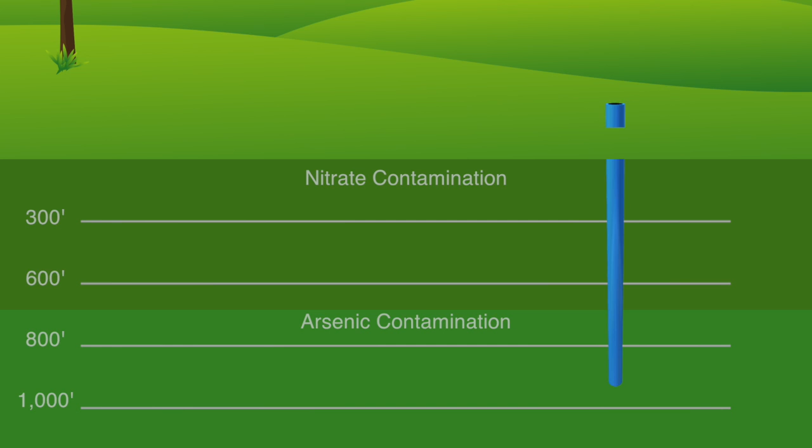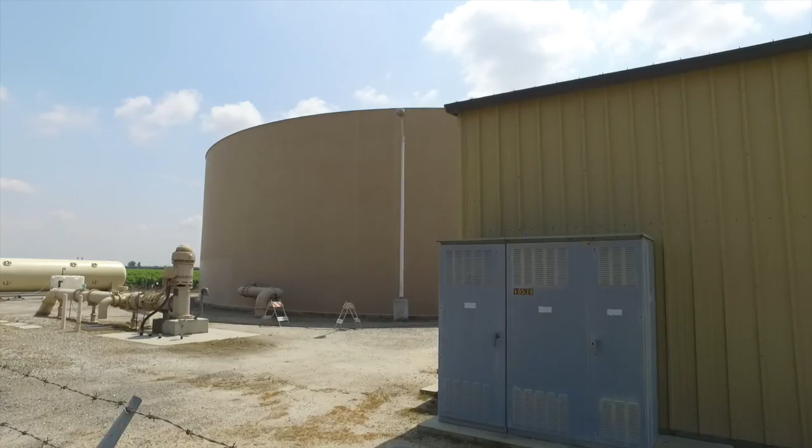During the 80s, when nitrate became an issue, in order to get away from it, we drilled deeper wells. We sealed them down to about 800, 900 feet, which got away from the nitrates. We're in the higher level, but the arsenic was below the MCL of 50 parts per billion, it was like in the 20s or 30s. So when the MCL changed for arsenic, we would have to either treat the wells that we had, or drill new wells. Out of 14 wells we drilled, 5 had to be abandoned because we couldn't make viable wells. The other 9, 2 of those we're having to treat. So we're shooting about 50%.

The community is very aware that they are paying for quality water and they want to get it on time, all the time. Nitrates going up and having to shut down that well was not going to be a pretty thing. Nitrate comes from a number of sources, including farm usage around here, a very agricultural area—that's the most common source for nitrates. We also can get it from septic tanks.

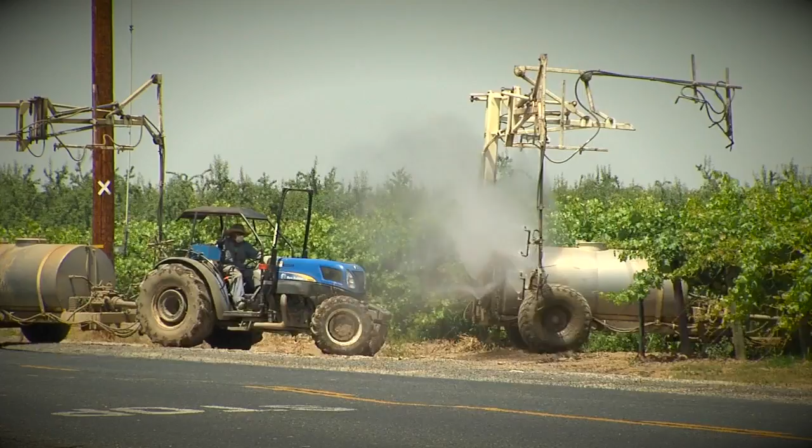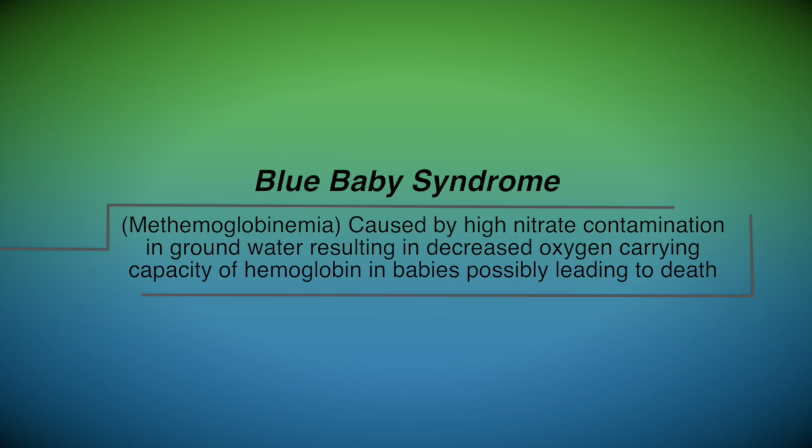The challenge is that it affects our populations in various negative ways, and there's even new research showing greater effects on the wider population that aren't yet quite understood. The main known health effect associated with nitrate is called blue baby syndrome. It's essentially a reduction in the oxygen carrying capacity of the blood. This is a particular issue for infants, where nitrate gets into the gut, can be converted to nitrite, and then literally the capacity for oxygen in their blood decreases. So you lose the ability to move oxygen throughout the body.

Nitrate is one of, if not the most common groundwater contaminant across the United States. It's found all over the Midwest, the agricultural Midwest. We find it throughout California, the Pacific Northwest, it's in Texas—it's really all over the country. You can see all the areas where there's a lot of agricultural activity, you see a lot of nitrate contamination.

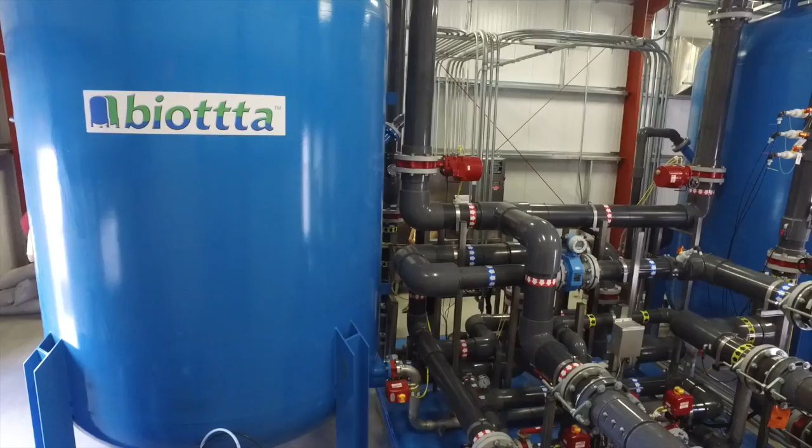Biological treatment is really an old school concept of using naturally occurring bacteria that are already in the groundwater, letting them grow up into a biological reactor and using them to chew up the contaminant and convert it to a completely harmless end product. You might call the nitrate to these organisms kind of like a Hershey bar—they're able to utilize the energy that comes from that, and that's how they grow, that's how they get the energy to grow.

MCL stands for maximum contaminant level. It's essentially the standard that the EPA sets for a particular contaminant in the groundwater. This particular well has a nitrate treatment issue—it's now above the legal limit for nitrates in the groundwater, and so a treatment system has to be put in place in order for them to use this as a reliable source of groundwater for the drinking water system.

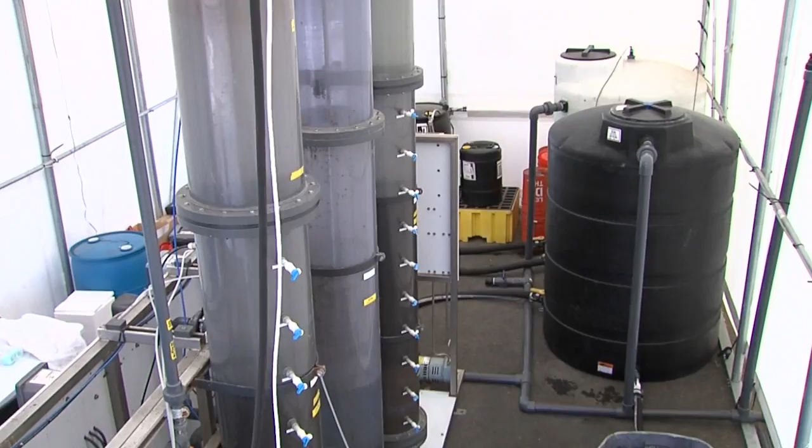So this is the City of Delano well 35. This is about our 3rd generation Biottta pilot. We have the raw water that's coming in, and you can see it's going to these break tanks. Once the water gets there, the pilot takes over.

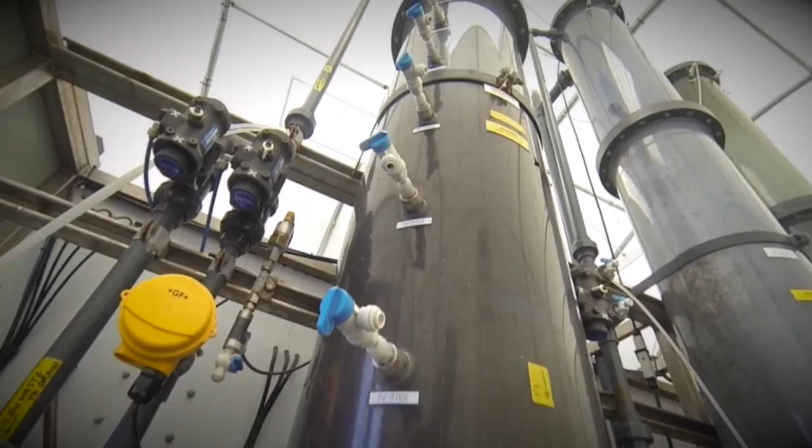There are basically 4 main components to these pilots: there's the unit processes, these tall columns right here, a feed pump here that takes water from the raw water break tank and pumps it through the system and to the unit processes. This is the first stage fixed bed bioreactor here, where all the nitrate gets reduced to nitrogen gas. This is the granular activated carbon that we use.

As you can see, this is absolutely fresh activated carbon, so we're not inoculating bacteria before we put them inside the biota process. We use bacteria that's already existing in the groundwater.

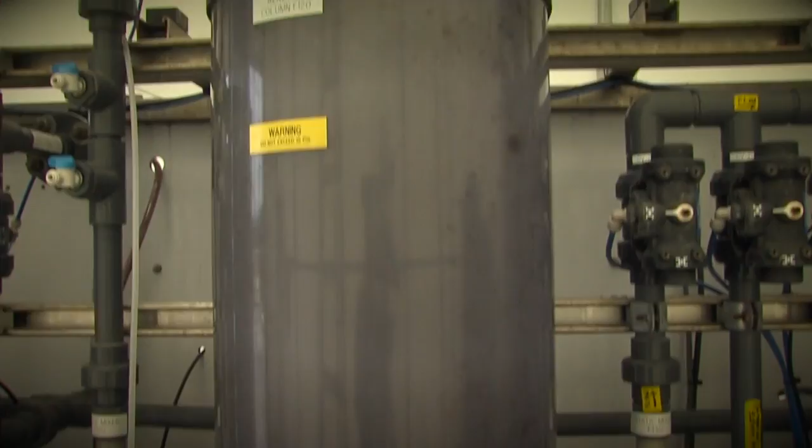The water then passes, it can either go into the second column, which is a degas unit, or it can bypass that column altogether and go into the second stage aerobic biofilter, that third column right there, which is both sand and GAC. So the first component is the unit processes.

The second main component of our biota pilots are the chemical feeds over here. You can see 5 tanks down below here that we keep full of the food for the bacteria. These tanks are filled every few days or so, and then little peristaltic pumps feed those chemicals into different parts of the unit process. So right now I'm making chemical stock for the chemical tanks that feed into the biota process.

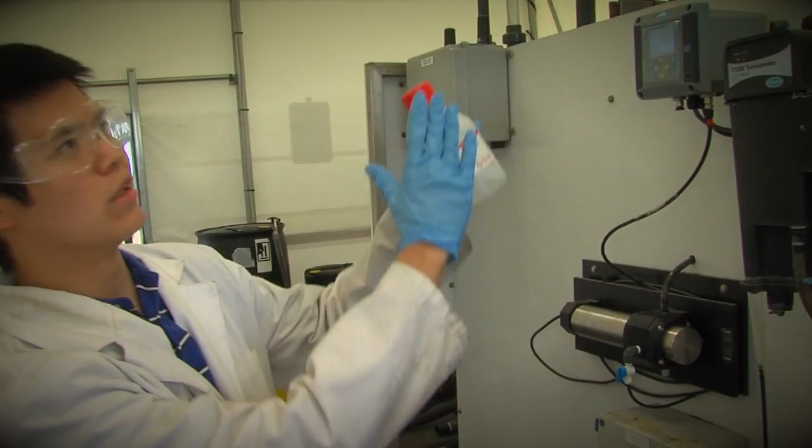So you can see these are the peristaltic pumps, and we can automate so that they pump a certain speed, a certain dose into our biota process.

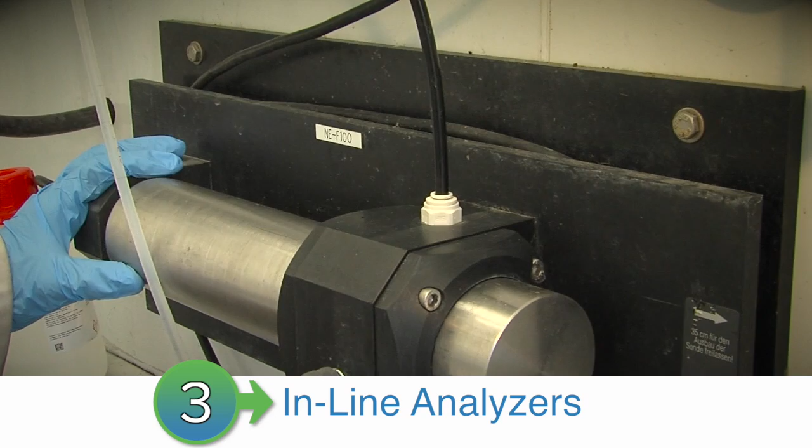The third part of our pilots are the inline analyzers, which you see above the chemical feeds. We have our inline nitrate analyzer, dissolved oxygen meter, and then 2 turbidimeters here as well.

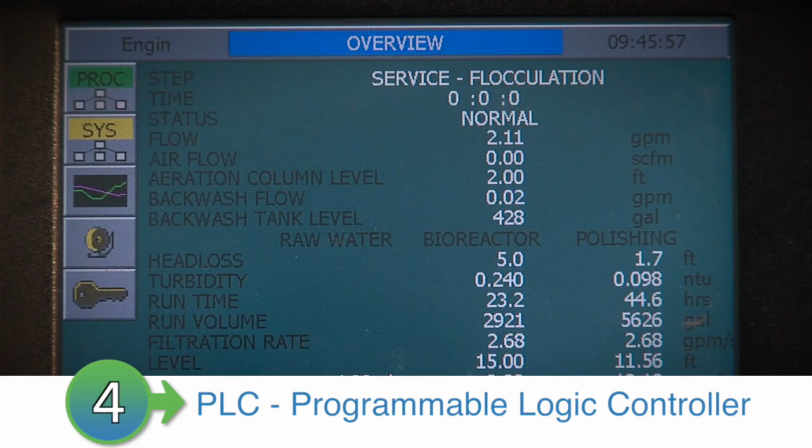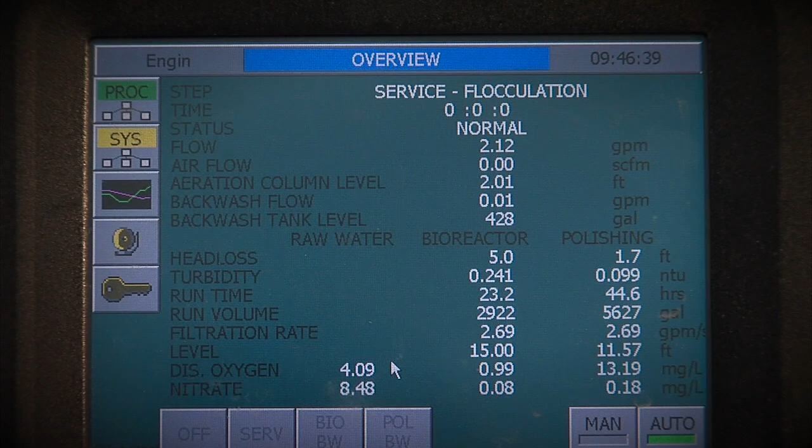Perhaps the most important is the brains - the fourth component, our PLC, which runs the system. It's very important that these systems are completely automated, so the system is programmed based on the operating set points that we've developed and honed over the years, and we can go in here, physically set those operating set points if we want, and download data and so forth right here on site, or this same human-machine interface right here, I can download onto my laptop wherever we are, wherever I happen to be, and look at that same screen and change operating parameters, download data, and things like that. This is the whole thing that makes the system go.

There are 2 main reasons why the biota system is particularly green. One is that it converts contaminants to harmless byproducts. The second thing is that the biota system requires very, very low energy to operate. The O&M costs on this system tend to be very low. We want to be able to put these systems in, and then they just go.

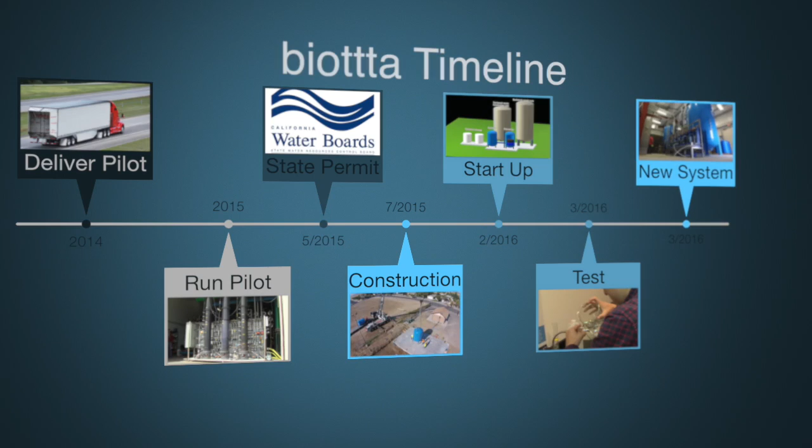The California Division of Drinking Water is a group we've been working with for a long time. They've given us the conditional approval for the process, and we'll be permitting the full-scale system that goes right here at well 35.

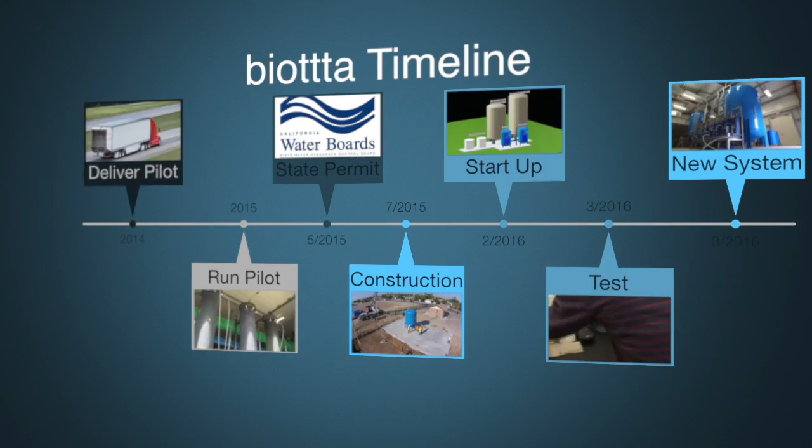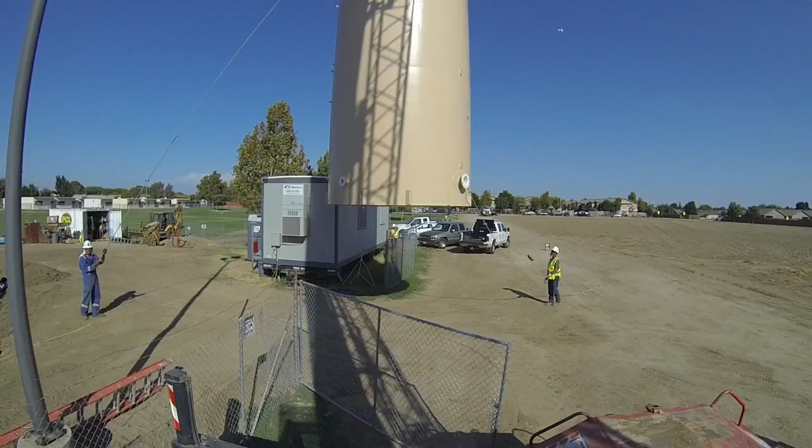This process started for this particular installation about 2.5 years ago, where we went and approached the state of California as a new technology that could solve a widespread problem throughout the Central Valley here, as well as throughout California, and ultimately throughout the United States and the world.

I found out about the Prop 50 Chapter 6B grant money. It is specifically targeted for research projects to address a contaminant that is of widespread concern, and the City of Delano was very excited to partner with us in this opportunity.

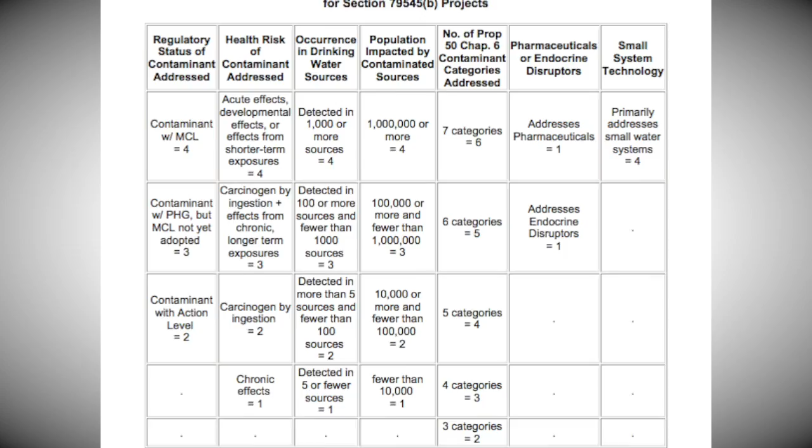Carollo has been an incredible partner with the city for the fact that we got to be the first site to be able to utilize their technology and their pioneering efforts, and even more, for it to be successful, I think it just speaks volumes in regards to their initiative and wanting to make sure society is able to progress and Delano benefiting.

So the pilot testing showed that we can remove the nitrate from the groundwater very efficiently in short contact times. We used all those design criteria from that pilot study to build this full-scale system behind me.

There couldn't have been any better results. It looked fantastic, and so there's very little doubt going into a full scale when you have such good pilot work.

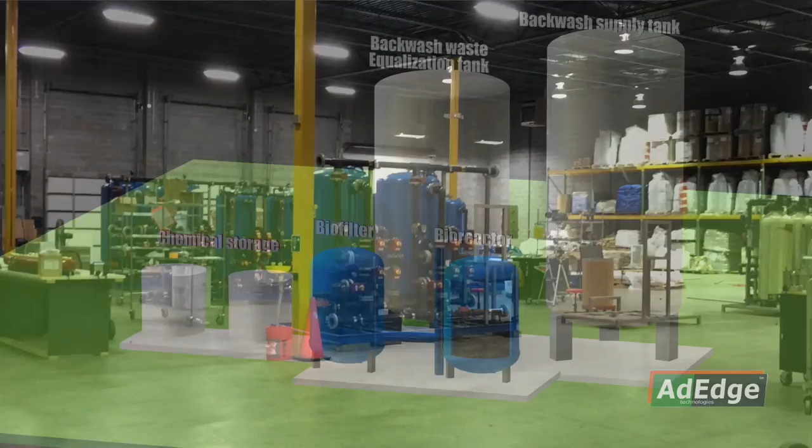AdEdge is an applications company. We bring technologies into the marketplace and apply them for communities, mostly in the groundwater industry for municipalities. And in the case of biottta, it's a biological process that's been developed, and then we bring it to the marketplace.

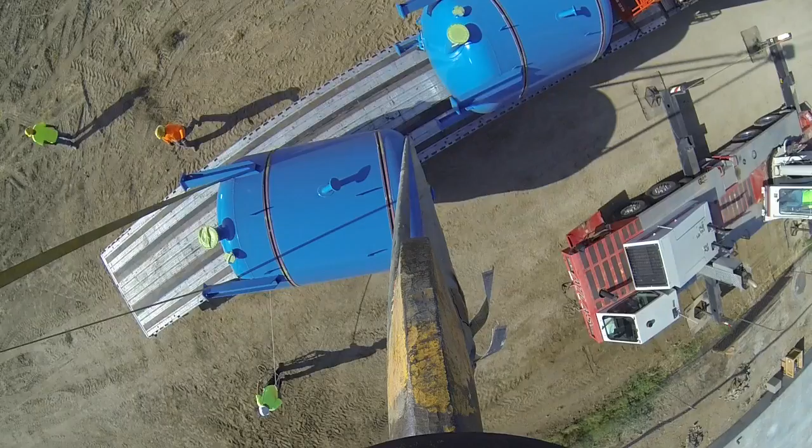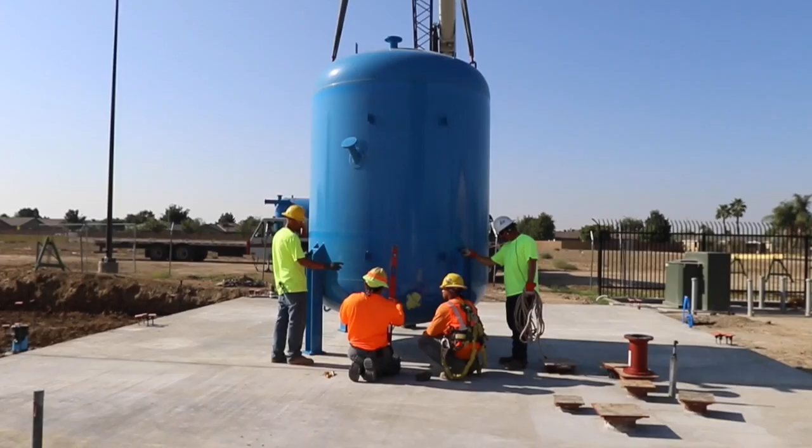In the case of Delano here behind us, we have a number of sub-assemblies that were manufactured at AdEdge in Duluth, Georgia. And so what that does for us is it allows us to control the manufacturing process and then deliver components to the site that then get tied together.

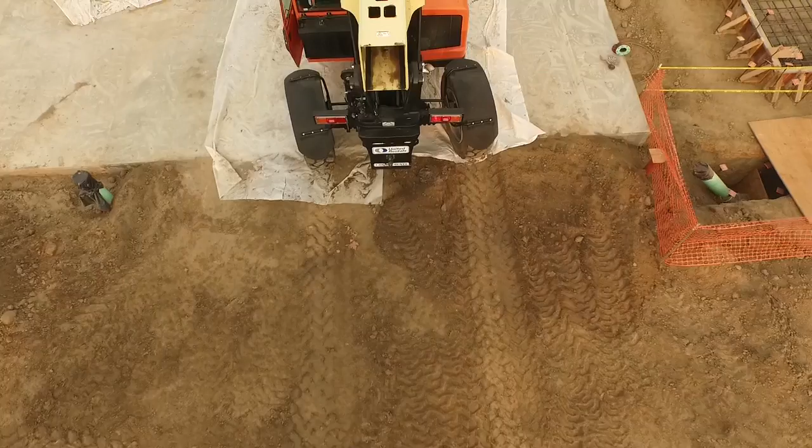So we have one main degas skid in this case, where that holds our process pipe, our valves. A lot of the moving parts are on that main skid.

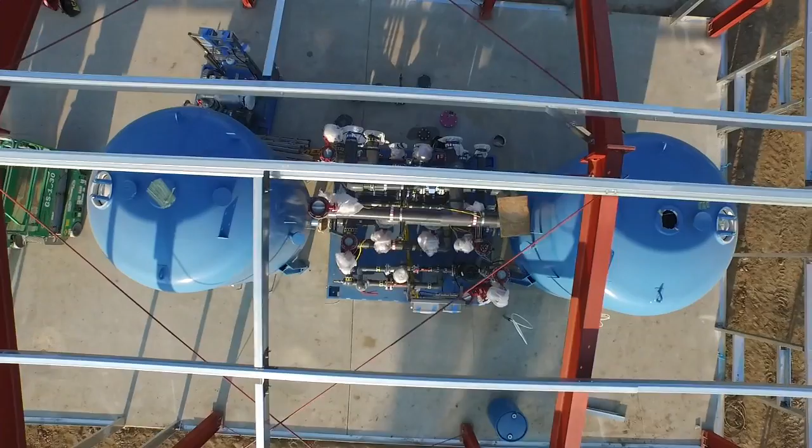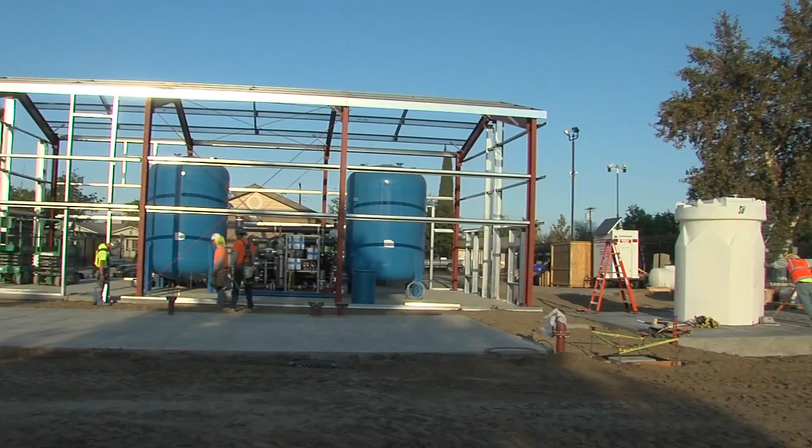And then we have a water quality analyzer, chemical feed process, and our blower and backwash package. So once that's delivered to the site, a contractor will pull together the vessels and sub-assemblies that we provide, and it'll finally be tied together by AdEdge coming out and doing an integration.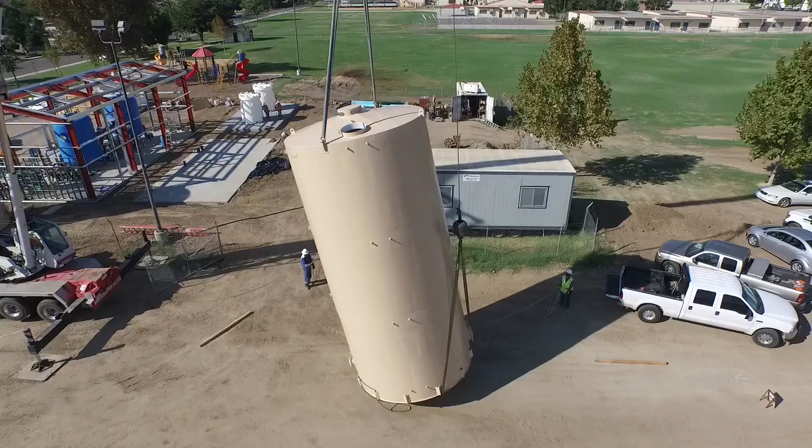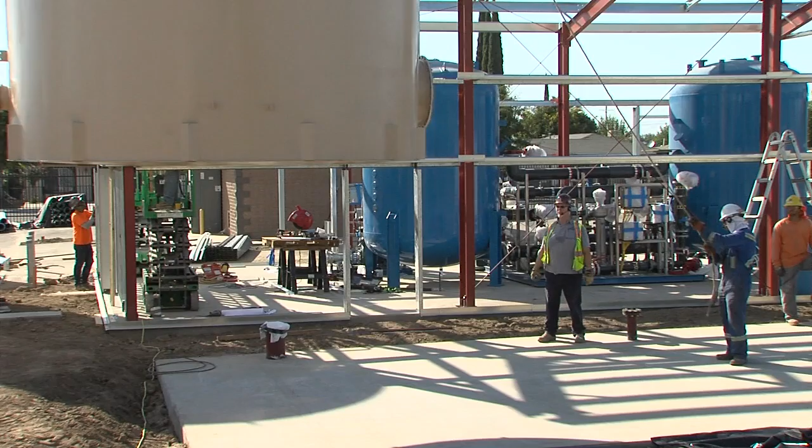Our vessels are manufactured by a vessel manufacturer that specializes in steel and fabrication. That's all ran through AdEdge. We're the ones selecting the manufacturers. So you can come to AdEdge with your issue, and essentially we deliver you a solution from an equipment side.

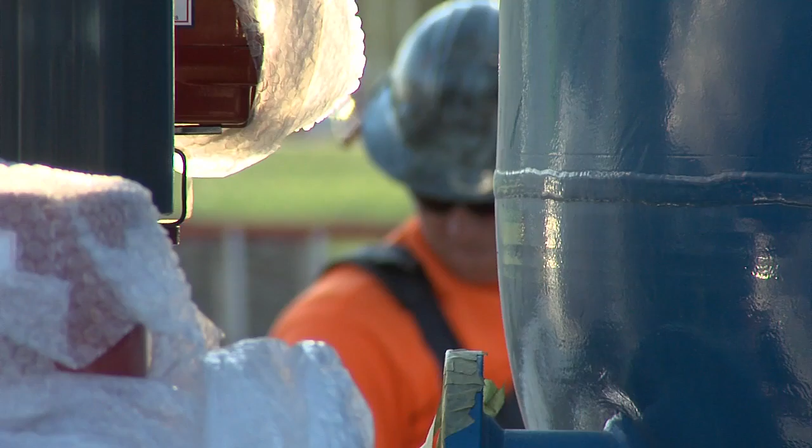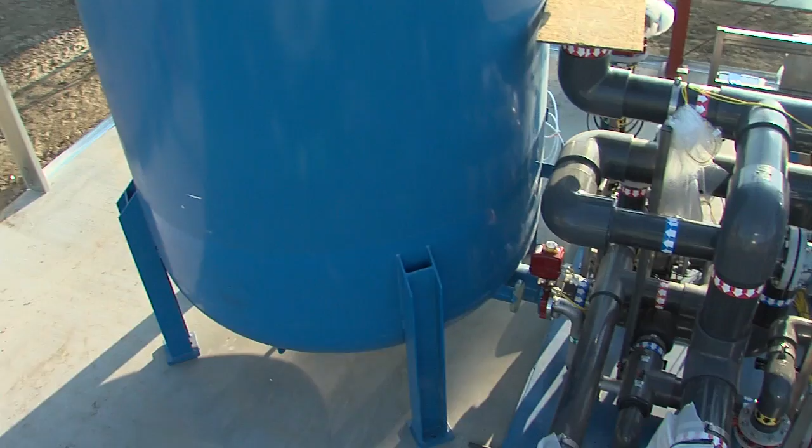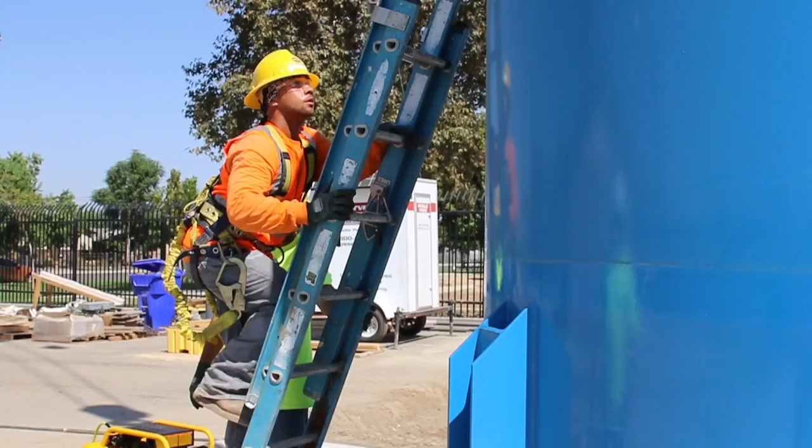When you bring the vessels in and then bring another skid in and try to pull all that together, essentially it fell into place like puzzle pieces. Design was done very smoothly. The overall project came together in a very short period of time. Anywhere from design to manufacturing to installation to now the system startup, everything has been very smooth and operating successfully. We've had a relationship with Carollo for years, so again, it went very efficient, I thought.

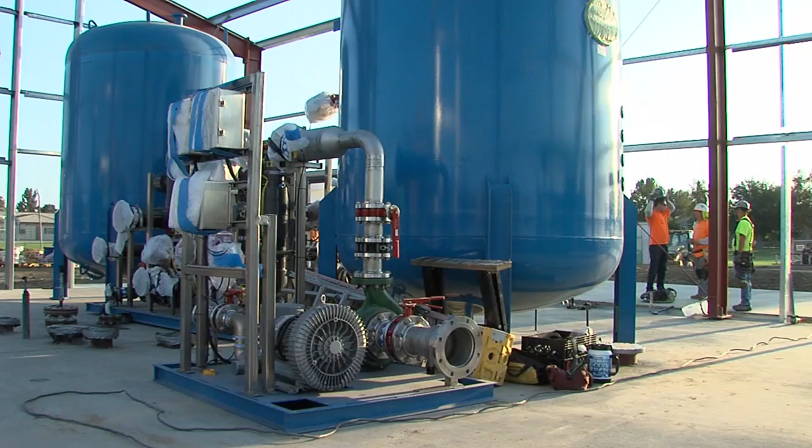The construction process went as well as any of our other projects that we've had, even though it's new technology. PCL has done a good job at not being overly burdensome on the community there.

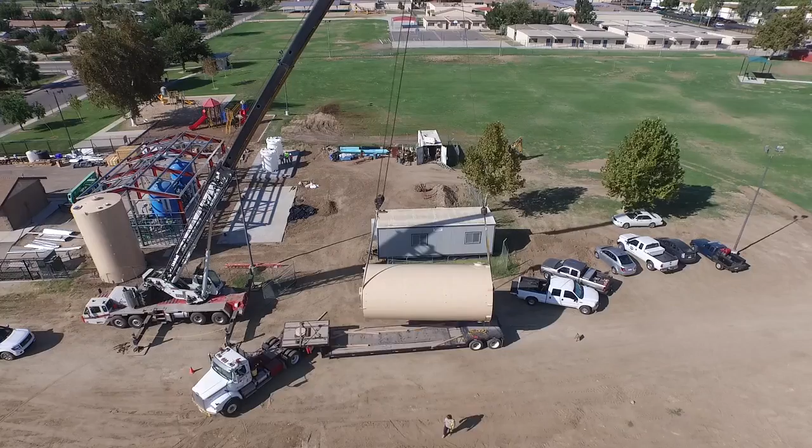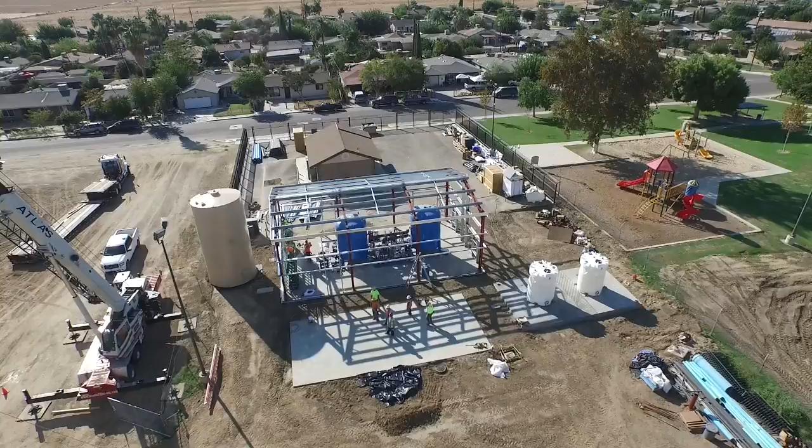The real baseline of the technology and the process at its core has been done throughout the United States and the world for decades, just in other applications. What we've tried to do here is take the basic concepts, see where there have been challenges in how they've been applied in other treatment processes, and try to improve each of those areas, getting over the hurdles that have caused problems in other places. And that's why we've landed with this type of system.

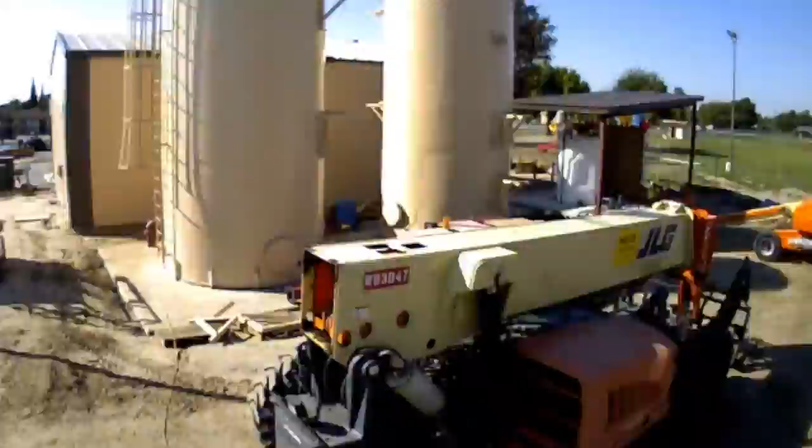So what you see here is a relatively small system, but it's easily scalable and modular up to millions of gallons per day. From the time we went into manufacturing, I believe it was around 16 weeks from when we delivered the equipment to the site. And then from the time that equipment was delivered, it was about 5 to 6 months before the plant was fully constructed. Things came together very rapidly.

I think the goal here is to make the bench version of what we tested work in a conventional setting. It's really a great thing for Delano to be able to use a well that they put in where they couldn't before, and now they'll get the benefit of that water.

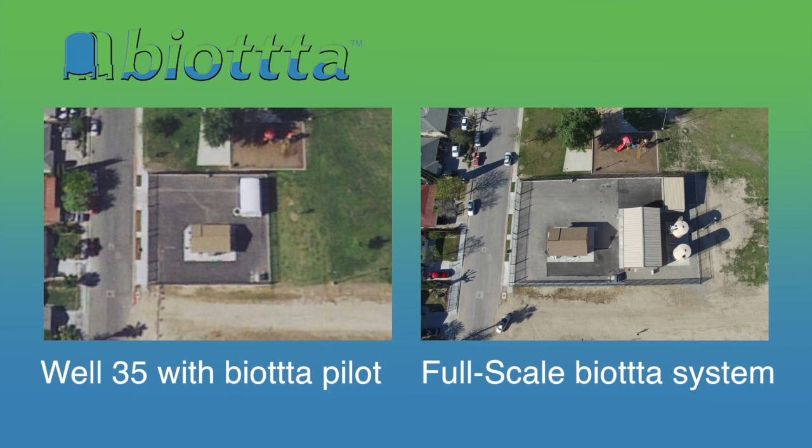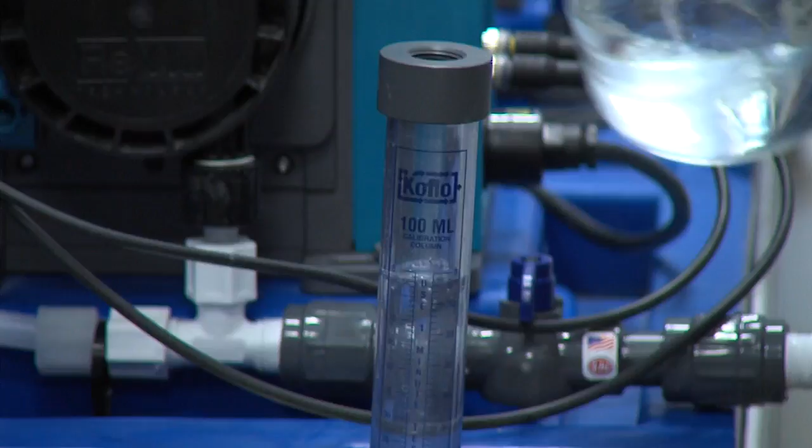Every plant is the same to operate, just depends on how big it is. I work here maybe 2 to 4 hours a week. The only reason I really have to come out here to the site is to ensure that I perform my laboratory tests as the regulators require.

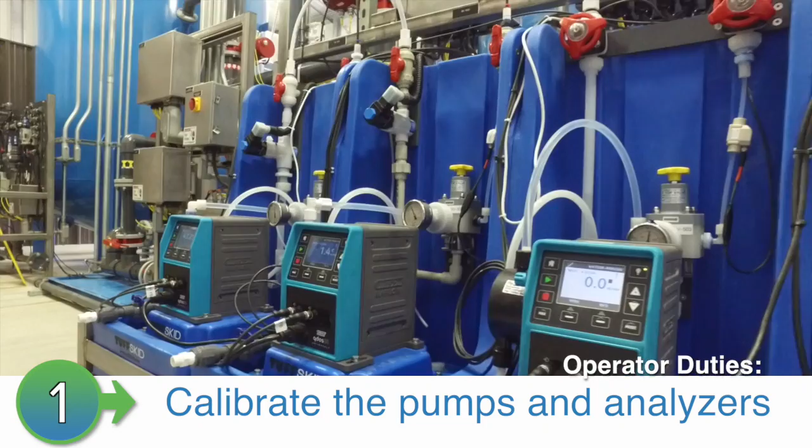There are 4 main duties an operator must perform at a biottta operation system. The first one is to calibrate the pumps and the analyzers to ensure that they're pumping and analyzing correctly. We need to pump chemical based on what the analyzer tells us. So those 2 components are critical to biottta operation.

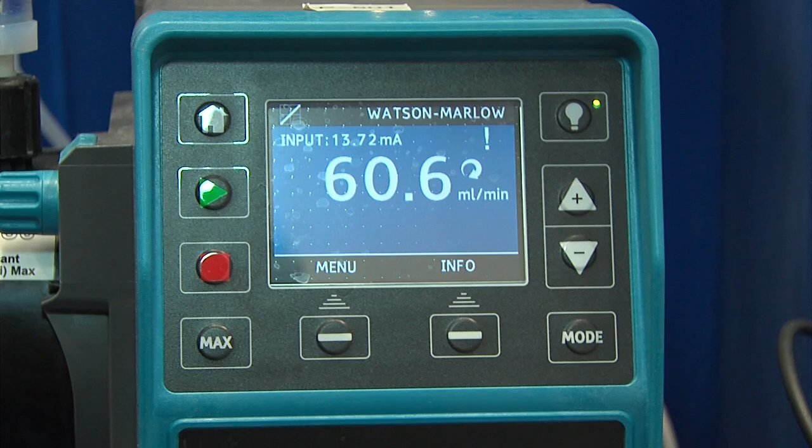The second operator duty would be to check and order new chemicals and materials as required. The third duty as an operator would be to maintain and keep the plant clean. And the fourth operator duty is to ensure that laboratory tests are performed as the state and regulators require.

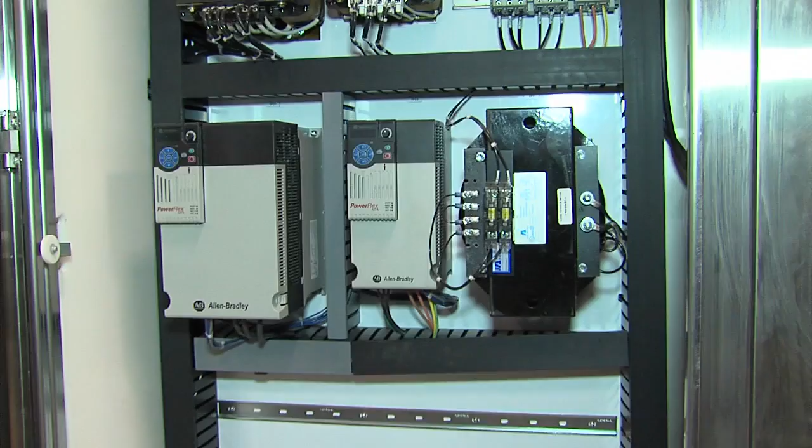So this is our programmable logic controller for the BiOTTTA facility. This is the brain of the facility. It controls all of our pumps, all of our analyzers, our chemical feeders. So it's monitoring everything going on in the system and telling everything what to do.

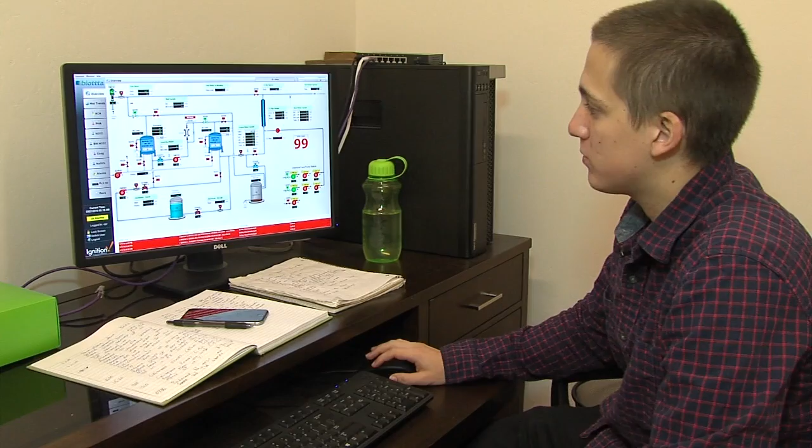This controls not only the brand new BiOTTTA facility, but the original well facility as well. This gives me total control over every aspect of the plant. We could see the results of all our analyzers in real time. We could also see how much chemical we have.

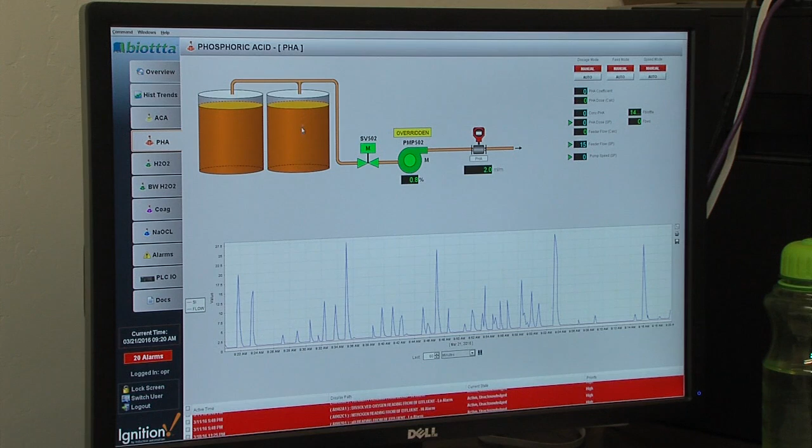Acetic acid, phosphoric acid, so you can see the tank levels. We have our hydrogen peroxide, our other hydrogen peroxide pump, coagulant. We have our PLC input-output.

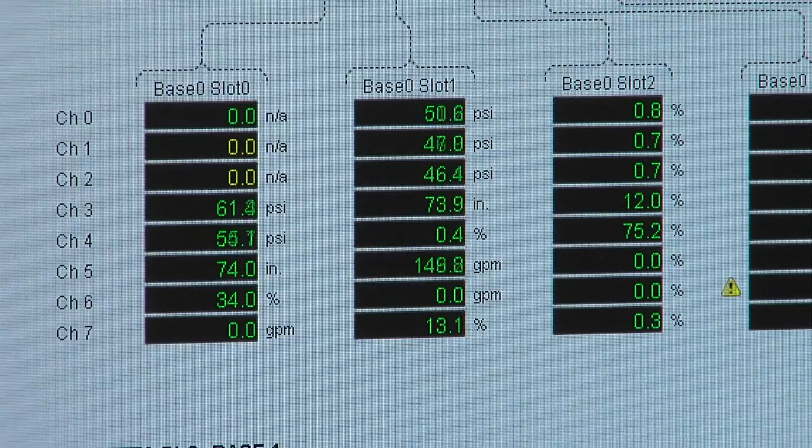I think we've learned a lot, just in the operations end of it. Engineering and operation are 2 different facets of what we do. So from the operations end, we've figured out some things that we may not need somewhere else, and some things that we may need to upgrade somewhere else.

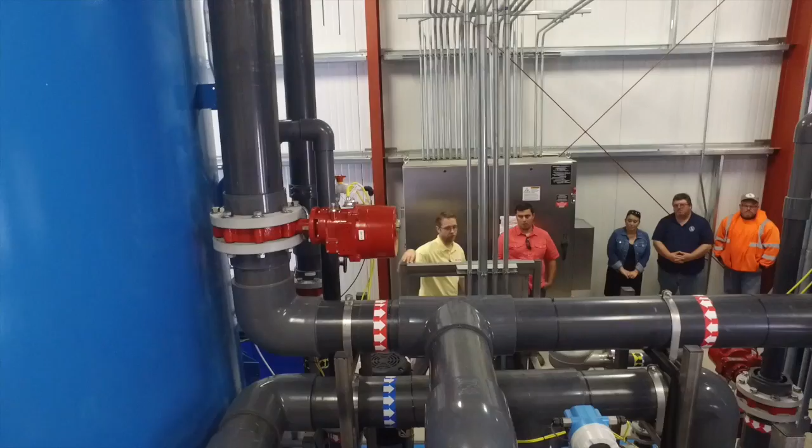Well, the education process that the grant will furnish is that there will be all the training involved for our staff, plus there's going to be additional training and classes for people that want to come in and look at the new technology.

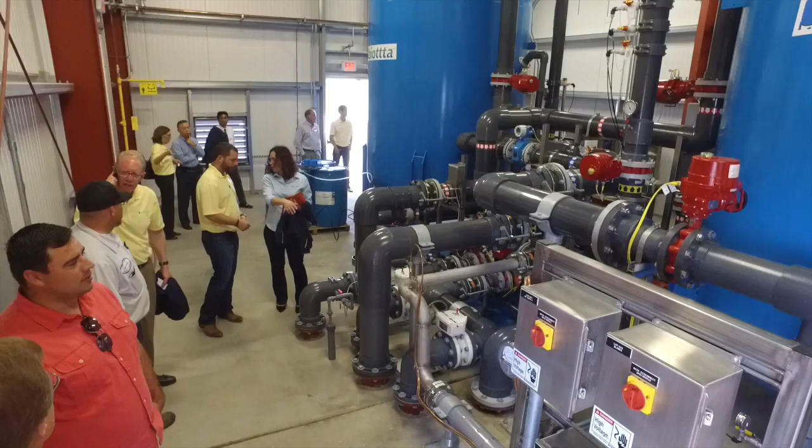The goal is for this to become a demonstration facility and an education center for nitrate, the problem of nitrate, the challenges of where it is throughout the state of California, and a new solution that can be applied throughout the Central Valley and other locations around the state and around the country.

You really want turnkey operations. The idea of this plant is you turn it on, it works, with minimal supervision and minimal operator interface. That's really the key to BiOTTTA.

I'd like to welcome everyone to today's Nitrate Education Center event at the treatment facility at Well 35. Water is a precious resource, and about 9 months ago, this well had to be shut down because the nitrate level reached a capacity that was unsafe for our people in Delano. But due to this new, pioneering technology, we're taking steps to hopefully make an example of what this could do not only for Delano, but for the state of California and possibly across this nation.

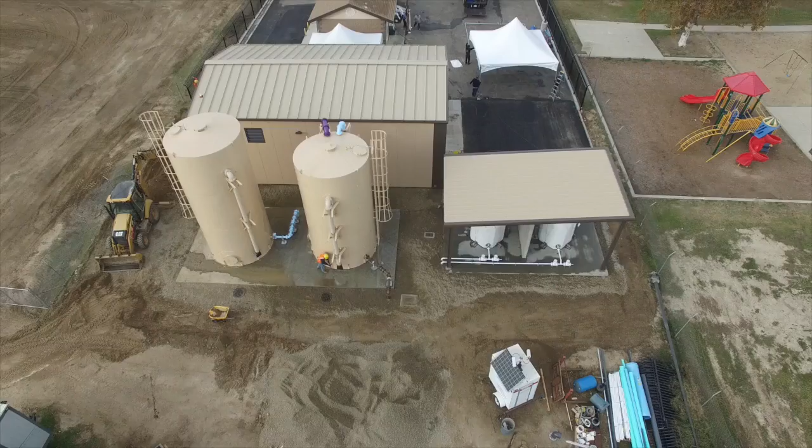There hasn't really been technology in the past that is as versatile as what Dr. Brown has put together here in this facility. It's truly a remarkable piece of technology. I know working on this project a couple years ago, we talked not only about this well and some of the other wells in the city of Delano, but even in the Central Valley, some of the things we're always concerned about are the reoccurring nitrates and arsenic.

When I looked at this project and saw what Carollo was bringing to the table with the BiOTTTA system, it's really not just an investment in the community, but in this technology, to see how well it's going to work. Because at the end of the day, for the mayor, the council, and everyone in the community, they want safe drinking water.

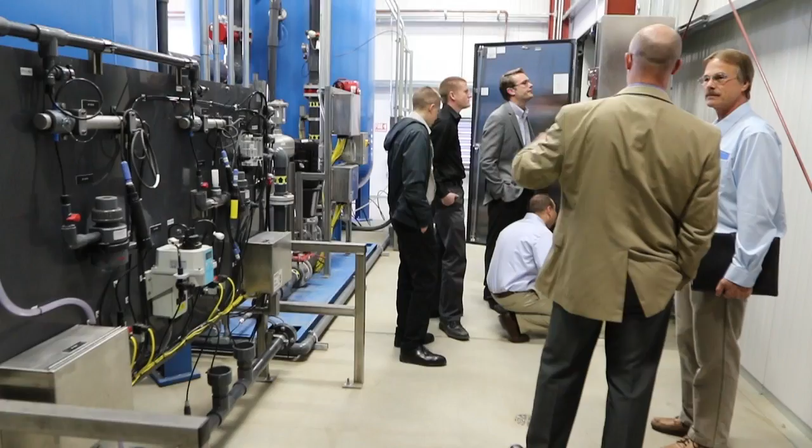To have this not only be a treatment facility for nitrate, but an educational opportunity—to bring people from surrounding communities in and teach them that this isn't magic, that it does work, and that it's based in science and engineering, and that it can be applied at larger scales. That's the next part of the magic we want to help create, and really solve this problem we've been struggling with in California for so many decades, without a solution like this that just pushes the nitrate down to somebody else's problem as we concentrate it. We're destroying it in an environmentally sensitive, sustainable way, and with very low energy.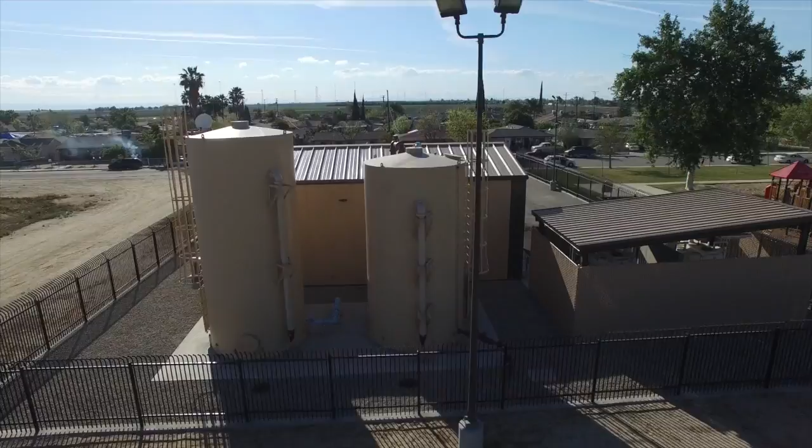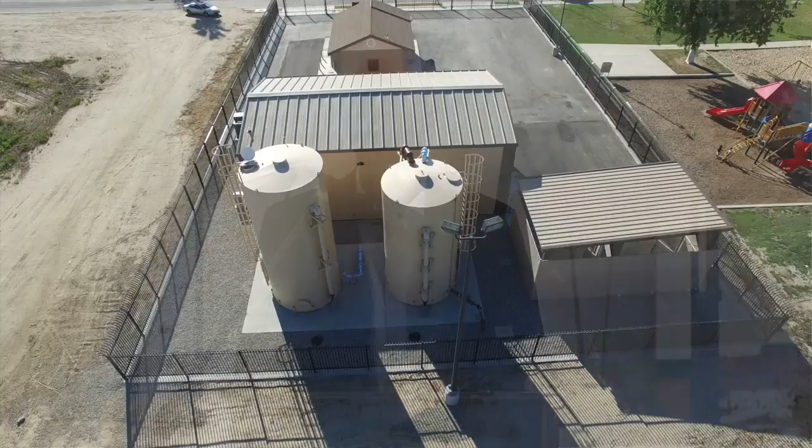I'm just really excited to be here. We've been talking about this day for so many years, and thank you for coming and thank you for having us in Delano for all this time. Delano has been an unbelievable host for us to come and play with some toys here for the last couple of years, and we hope to continue that relationship for a long time. Thank you.

The facility's been operating for a little over a week and a half now. The nitrate coming in is about 10 milligrams per liter, right at the limit. Coming out of the system it's less than 0.2 milligrams per liter, so we're getting complete nitrate reduction. We have some optimization of the post-treatment left, but right now everything is looking great in terms of nitrate removal. A lot of the challenges we foresaw are not going to be challenges for the process.

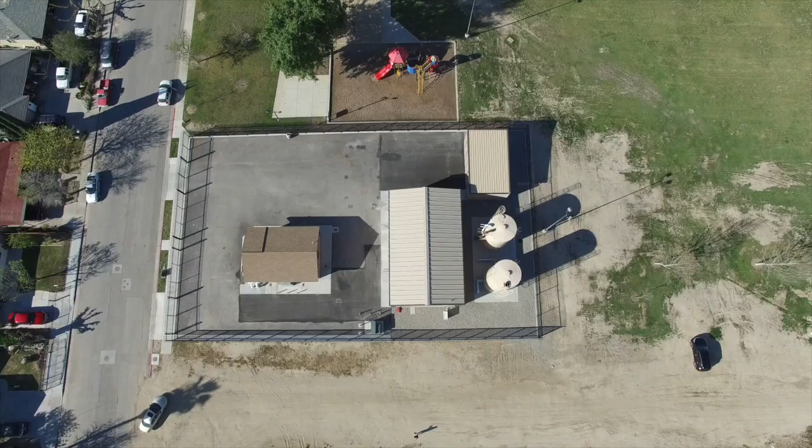So it's going to be simpler for the process, and with that, you have a product with a higher quality standard because it's replicated. We're able to bring it to the marketplace faster, and you're going to see a lower cost as a result.

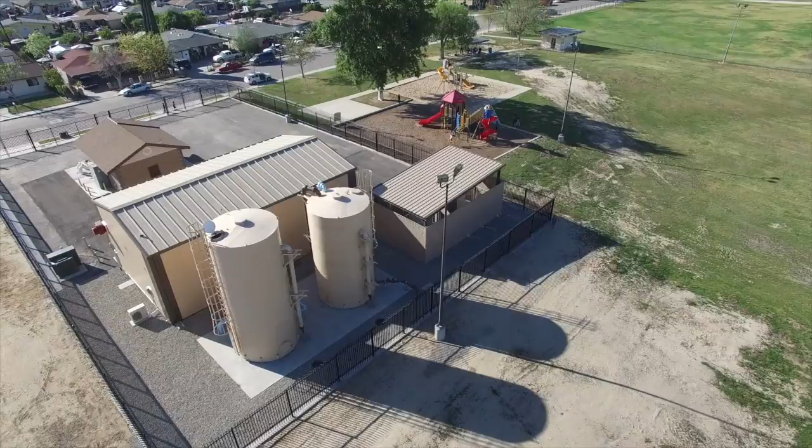The fact that this was the first and only plant of its kind, and that we were able to implement this technology here in Delano, makes me feel proud that the community sees us making sure we're providing a service. Not only providing a service, but looking out to the future—making sure the people of Delano have something to look forward to, and that's clean drinking water. And if there are issues of nitrate, well, we found a solution.

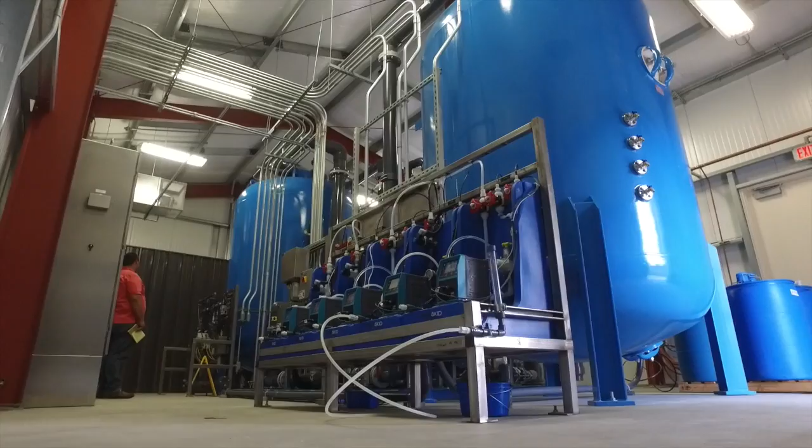When you're implementing a brand new technology, you always run into the issue of people wanting to see a full-scale facility. They want to talk to the operators. They want to see it operating successfully. You need a full-scale track record.

Up to this point, we haven't been able to point to a particular facility, and so it's been a barrier to implementation of this technology. This facility is going to help us overcome that. It's really going to open up doors toward implementation here in the Central Valley, across the state of California, across the United States, and really globally as well.